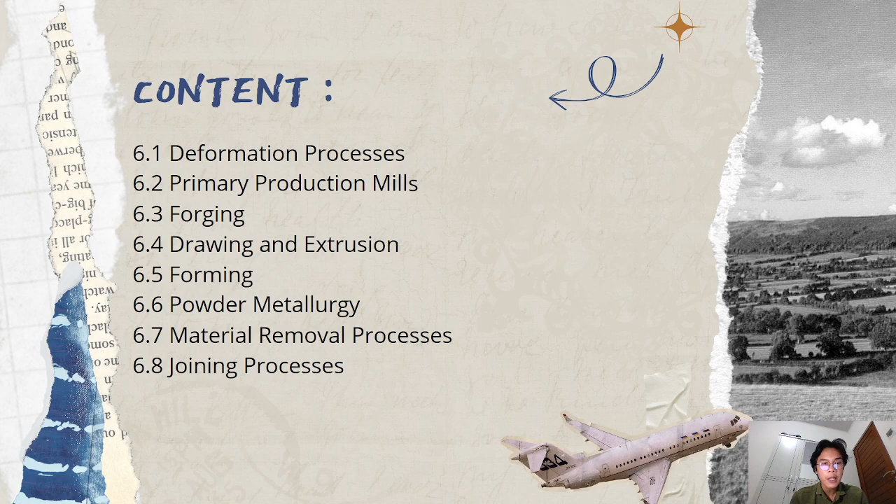Fabrication and finishing of metal products. Metal products that are subject to mechanical reduction operations subsequent to casting and solidification are referred to as wrought products. These products can be shaped, finished, and assembled by using a variety of metalworking techniques, which might include metal forming, metal removal, and joining. Depending on the alloy system and the intended application for the finished products, there are a staggering number of production techniques that might be employed.

The possibilities range from high volume mill production as shown in figure 6.1, to the manufacture of complex parts by powder metallurgy in figure 6.2, or the joining of thin foil by ultrasonic welding in figure 6.3.

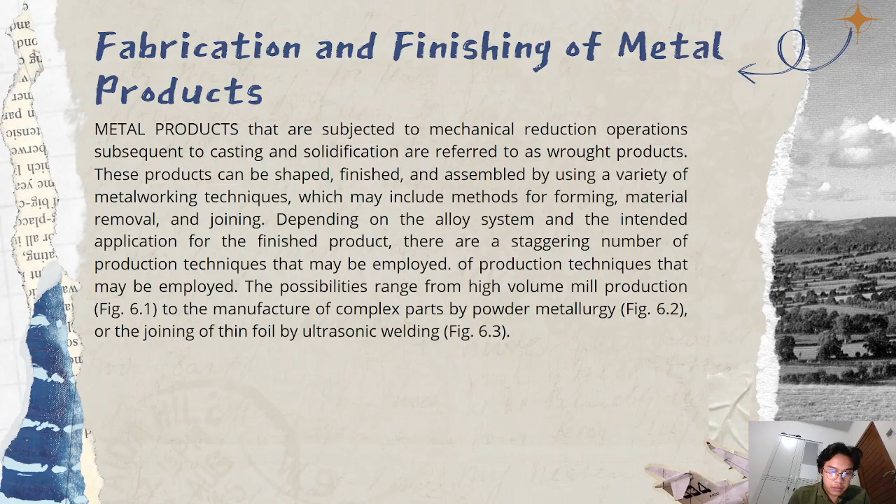In the fabrication and finishing of metal products, picture 6.1 shows radial forge processing of nickel based superalloy into round billet, courtesy of Allvac AT. Picture 6.2 shows multi-level gears produced by powder metallurgy, courtesy of Metal Powder Industries Federation (MPIF). Picture 6.3 shows ultrasonic welding of aluminum foil, courtesy of Sonobond Ultrasonics Inc.

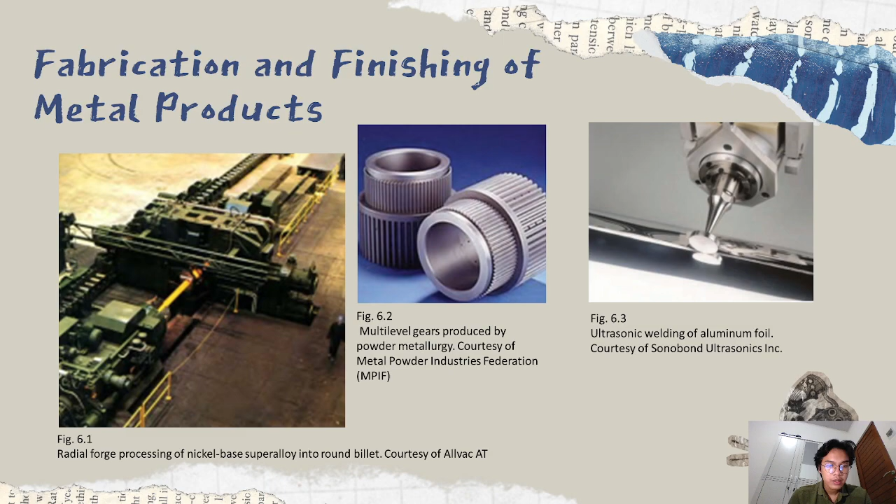Deformation process: in the metalworking process, a workpiece such as a billet or a blank sheet, for example, can be plastically deformed by a set of tools or dies to obtain the desired final thickness and geometrical configuration.

Metal forming processes can be classified into two general categories: first, bulk or massive forming operations, and second, bending and sheet forming operations. Sheet forming is sometimes simply referred to as forming in the broadest and most accepted sense. However, the term forming can be used to describe both bulk deformation process and sheet forming and bending process.

Forming is performed through contact between the surface of the deforming metal and a tool. The nature of the material flow and pressure deformation primarily depends on the type of forming process used, the temperature, the applied loads, and the frictional stress between the tool and the workpiece material.

You can see in picture 6.5 the flow stress versus amount of deformation for 304L stainless steel at cold and warm working in A, and hot working temperature in B. In picture 6.6, A is cold working and B is hot working. You can see the picture about the process.

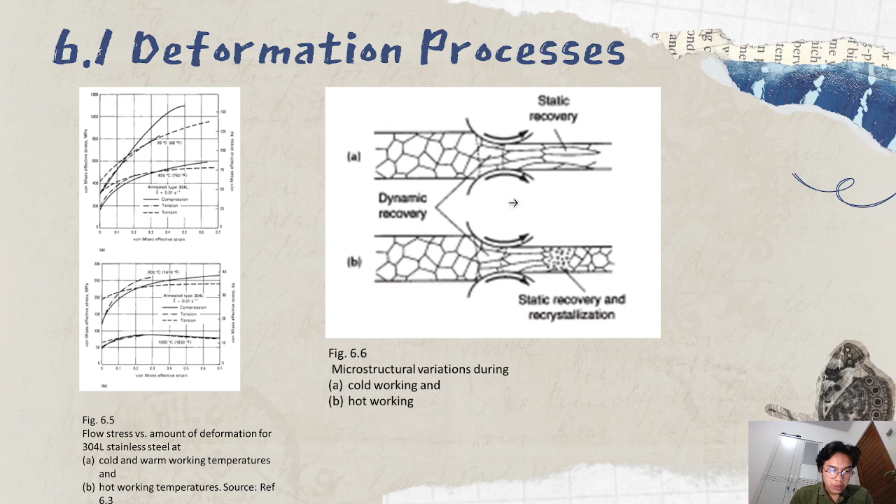6.2 is primary production mills. In the primary production operation, the initial stage of metalworking involves the breakdown of a coarse structure into a wrought structure. The starting material is usually either an ingot from static casting or continuous cast slabs or billets.

With conventionally cast ingot structure, wrought workability is very low due to the relatively coarse microstructure and extensive segregation of impurities. Thus, ingots undergo a primary reduction step that consists of either forging or rolling, as they are processed into semi-finished shape.

Picture 6.7 shows uniform, unbroken grain flow around the contours of the forged head of a threaded fastener. This uniform unbroken grain flow minimizes stress risers and unfavorable shear planes and therefore improves fatigue strength.

In 6.8 you can see the production mill process. This shows the many processes involved in the production mill.

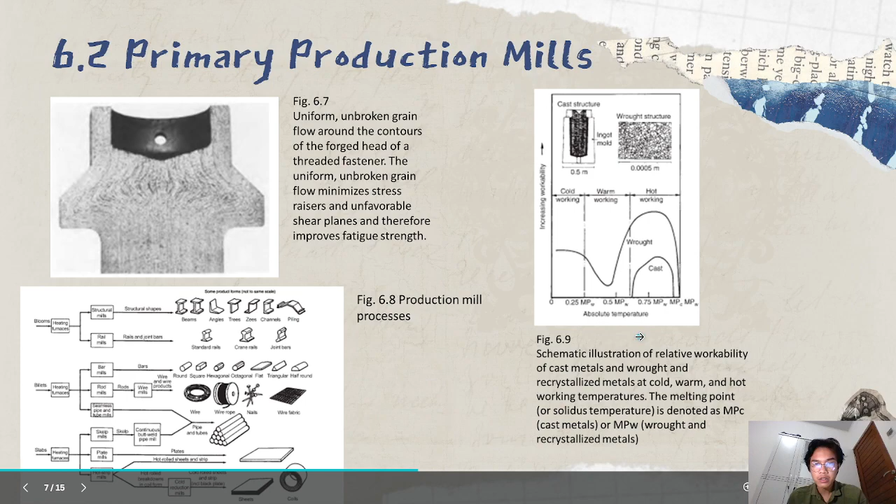Picture 6.9 is a schematic illustration of relative workability of cast metal and wrought and recrystallized metal at cold, warm, and hot working temperatures. The melting point, or solidus temperature, is denoted as MPC or MPW. MPC is cast metal and MPW is wrought and recrystallized metal.

6.3 is forging. In its basic form, forging consists of applying compressive stress to a piece of metal known as the workpiece, between a pair of dies, in order to permanently change its physical dimension or geometry. Large forgings are processed by primary mills, but forgers also process work product in the form of bar, billets, or blooms for subsequent forging on hammer and press.

Table 6.2 shows forging processes: open die forging, closed die forging, coining, hobbing, incremental forging, isothermal forging, radial forging, rotary forging, precision forging, rotary swaging, and upsetting.

Picture 6.11 is a comparison of typical design limits for rib web structural forgings, where A is aluminum alloys and B is nickel based alloys. The dimensions are given in millimeters.

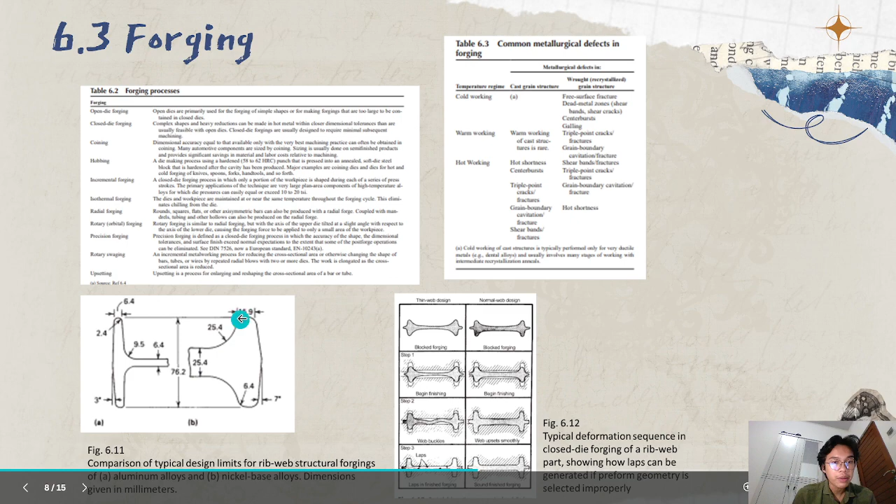Table 6.3 shows common metallurgical defects in forging: cold working, warm working, hot working, and the three temperature regimes.

Picture 6.12 shows a typical deformation sequence in closed die forging of a rib web part, showing how laps can be generated if the preform geometry is selected improperly.

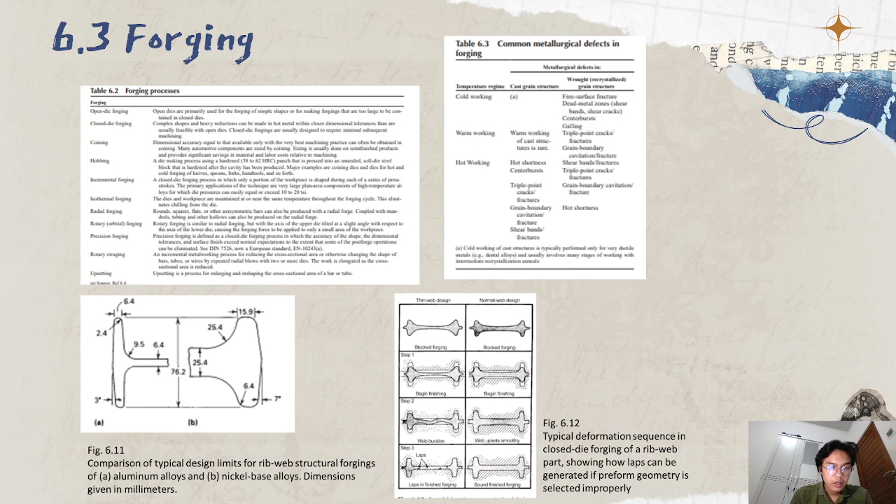Section 6.4 is drawing and extrusion. Drawing is one of the oldest metal-forming operations, used to make long products with excellent surface finish, closely controlled dimensions, and constant cross-section, where tubes are drawn in a similar manner.

The general practice is to place a mandrel, also called a plug, or a solid bar with a blunt end inside the tube. As the tube is drawn, metal flows past the mandrel, which controls the inside diameter of the tube and supports it during deformation.

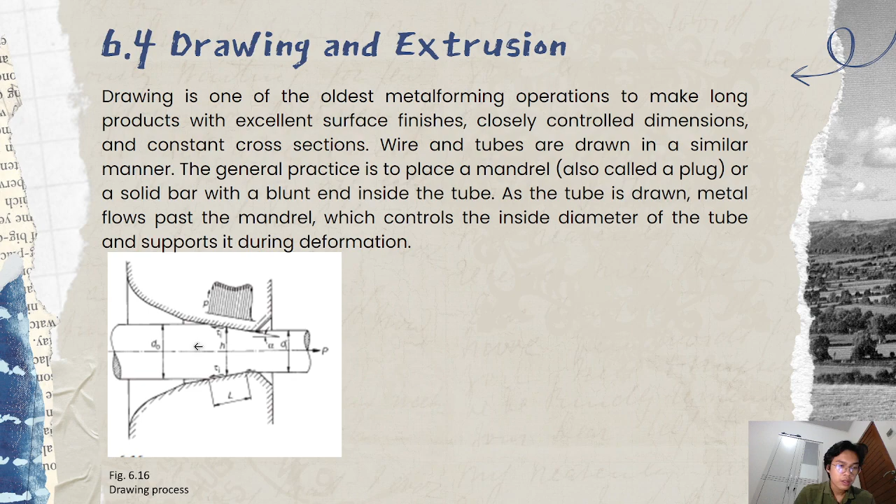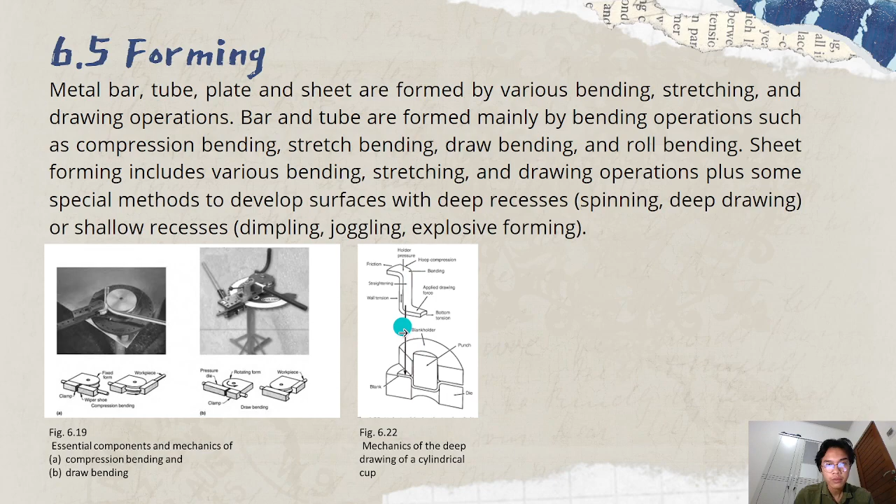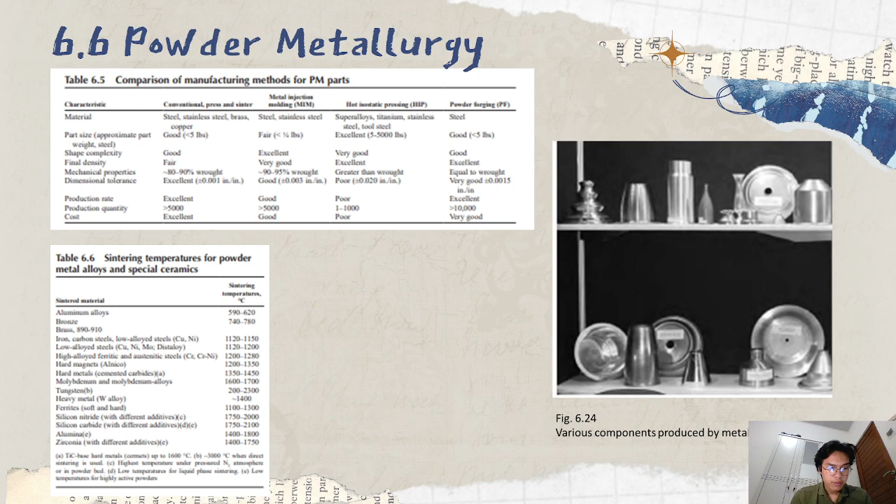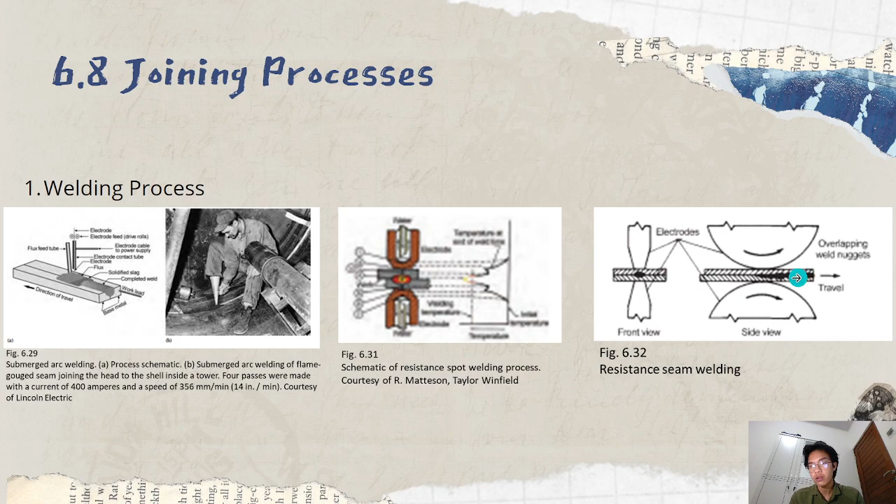Picture 6.32 shows resistance seam welding. You can see the welding setup here in front view, with electrodes, side view, and the travel direction shown.

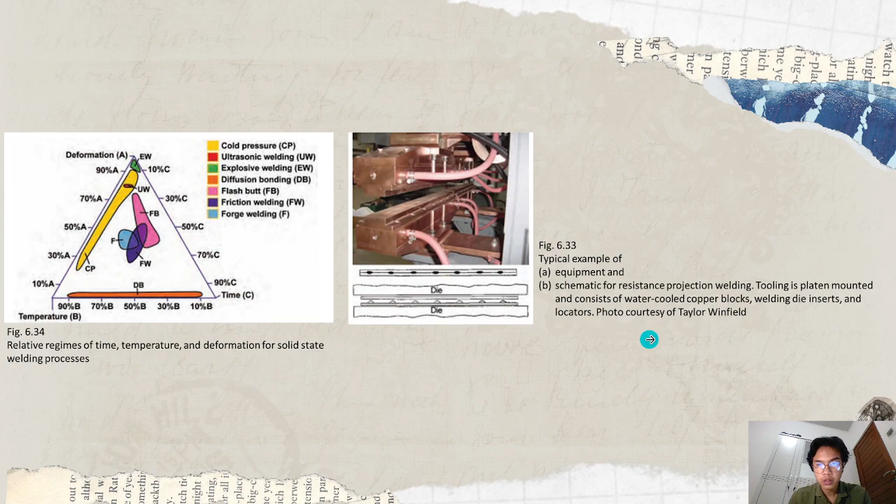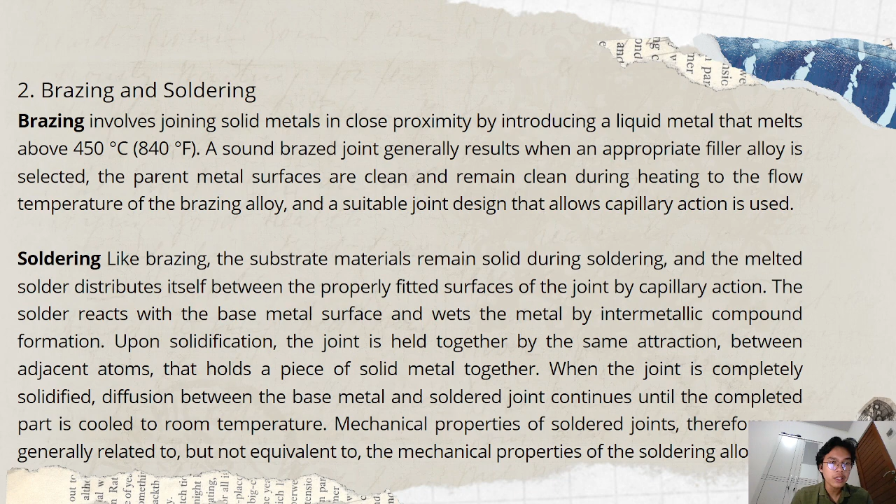Soldering is like brazing, but the substrate material remains solid during soldering, and the melted solder distributes itself between the properly fitted surfaces of the joint by capillary action. The solder reacts with the base metal surface and wets the metal through intermetallic compound formation.

Upon solidification, the joint is held together by the same attraction between adjacent atoms that holds a piece of solid metal together. When the joint is completely solidified, diffusion between the base metal and soldered joint continues until the complete part is cooled to room temperature.

Mechanical properties of soldered joints, therefore, are generally related to, but not equivalent to, the mechanical properties of the soldering alloy.